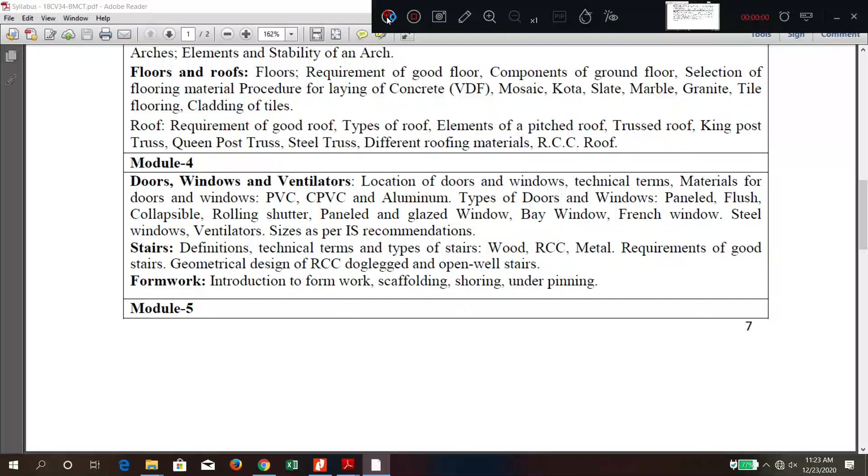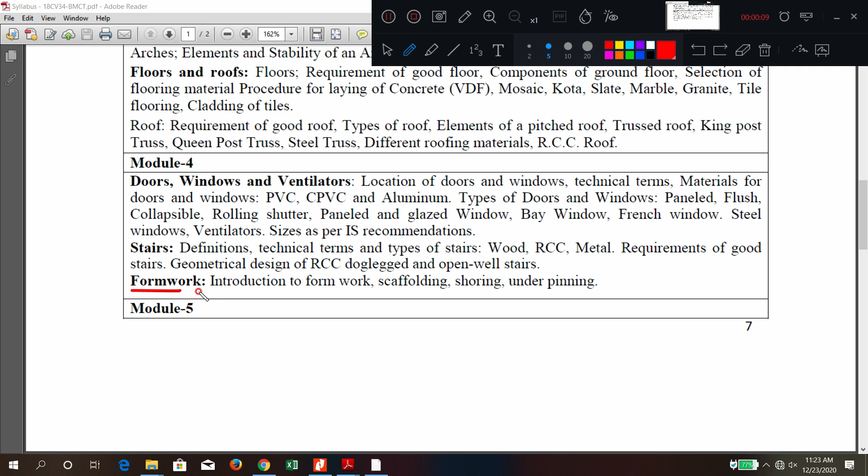Good morning, friends. Today we are going to discuss the next part in module 4, that is formwork. In this one we are going to discuss formwork, scaffolding, shoring, and underpinning. These concepts come under module 4.

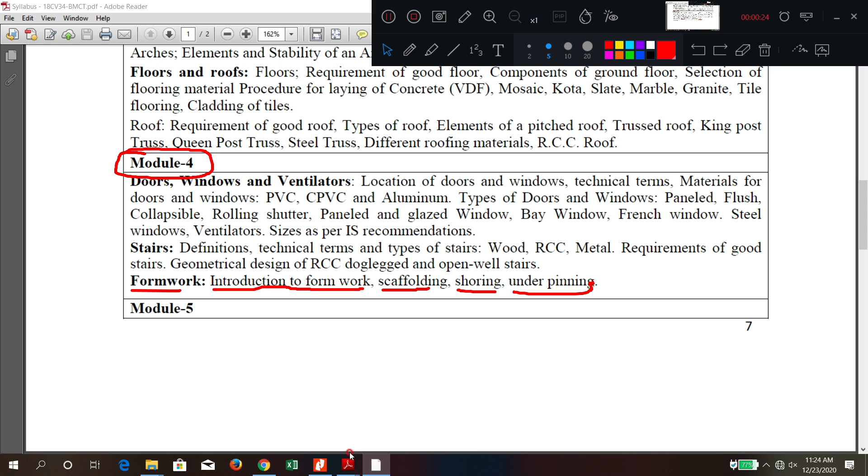Now when you hear the word formwork, what idea comes to mind? Formwork is a supportive structure given to concrete when it is in a fresh state. During the fresh state, concrete is not solid, it has not got hard, so to maintain its shape, size and dimension, a supporting structure is needed. This may be horizontal, vertical, or inclined. This supporting structure acts as a mold, so it is called a mold. It may be steel, wood, plywood, or a combination of materials, which supports the concrete during its fresh stage until it gets hard.

Then we are going to remove this formwork. Once it has sufficiently got hard, we can remove it easily. So removing of formwork is called stripping, a very important word.

For walls, the stripping time is different. Stripping is conducted once the concrete is sufficiently hard. There are different timings for stripping of different elements: for walls maybe 3 days, for slabs maybe 20 days, for columns maybe 7 days, for beams maybe 21 days. These different stripping times are mentioned in the Indian Standard Code.

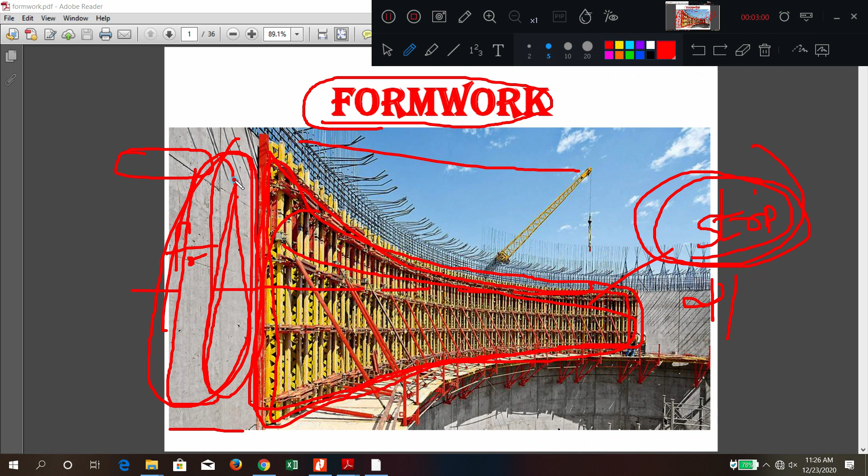So, first we have understood that formwork is a supportive structure which supports the concrete during its fresh stage until it gets hard. After it reaches sufficient strength, the formwork can be removed, and this removal is called stripping of the formwork. There are different timings, meaning after so many days only we should remove the formwork. If we remove the formwork before that, while the concrete is still in a fresh state without sufficient strength, the concrete may get damaged.

After understanding the definition and brief introduction, here we can see a typical wall, the wall of a dam. Similarly, we have so many other types of formwork for different types of elements.

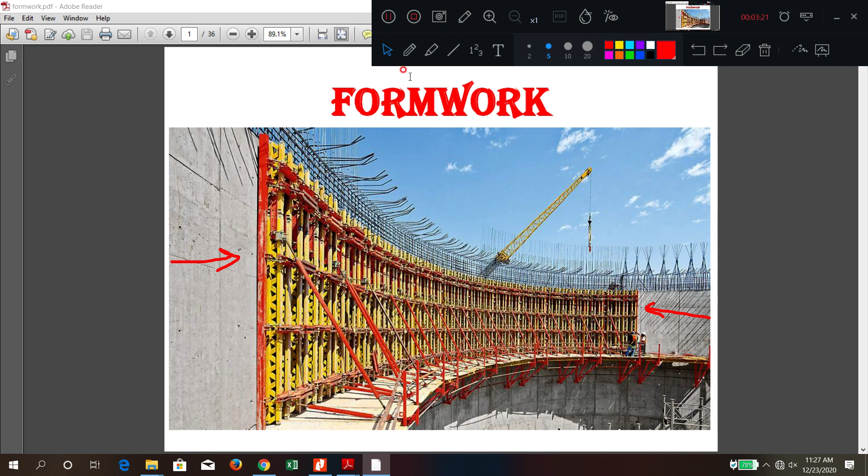Now you can see the definition here. Formwork or shuttering, it is also called shuttering, is a temporary construction in the form of molds. Molds mean something can be put or filled inside. So these are called molds, in which concrete is placed and allowed to get hard.

The cost of formwork may be around 20 to 25% of the total structure cost, which is a very important consideration. So whatever materials you use in the formwork should be strong and capable of being used repetitively. If used repetitively for the next structure, it becomes economical. Still, the cost may be higher, up to 30% or 40% in bridge construction.

When concrete has reached the certain required strength, only then is the formwork removed. So the operation of removing the formwork is known as stripping. After stripping, the formworks are reused for other building parts.

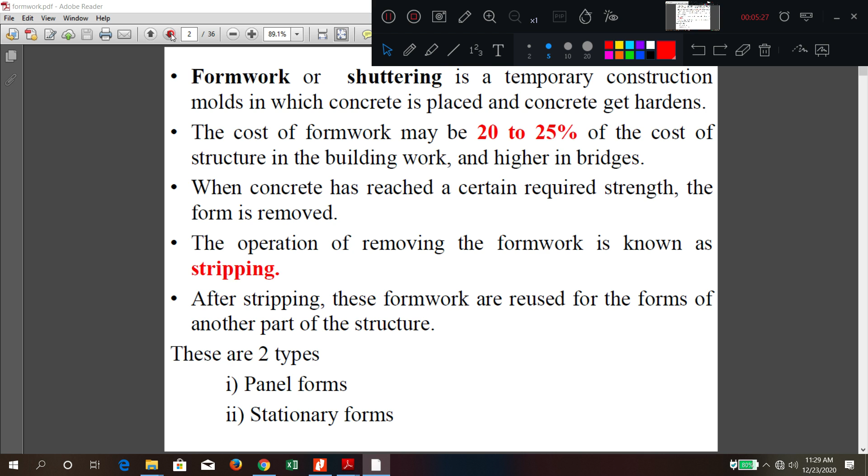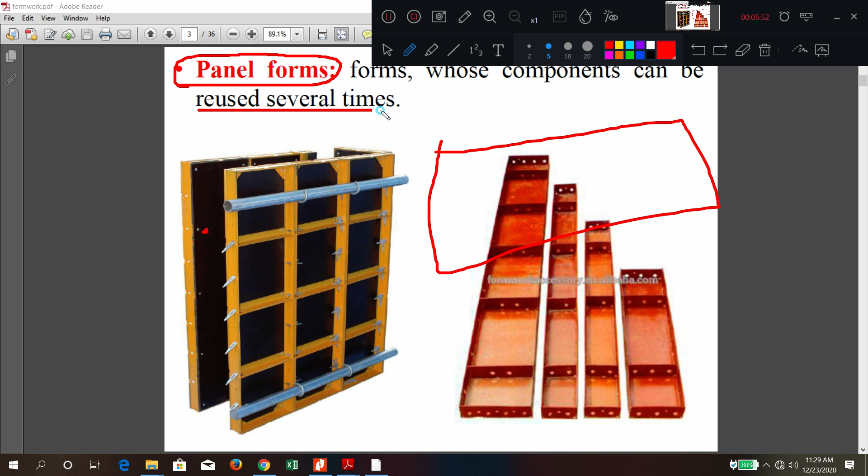Now we will go to the diagram part and understand different components. This is a typical diagram for panel type formwork. For a wall, it can be used in one part, and after hardening, these panels are removed from that position and fixed again in another position. That is why it can be reused several times.

Generally panel forms are in the shape of rectangle or square. Here the joining assembly can be made, where all the apparatus can be used, fixing of nut bolts, clamps, and supporting structures will be there. These are typical examples for panel type formwork.

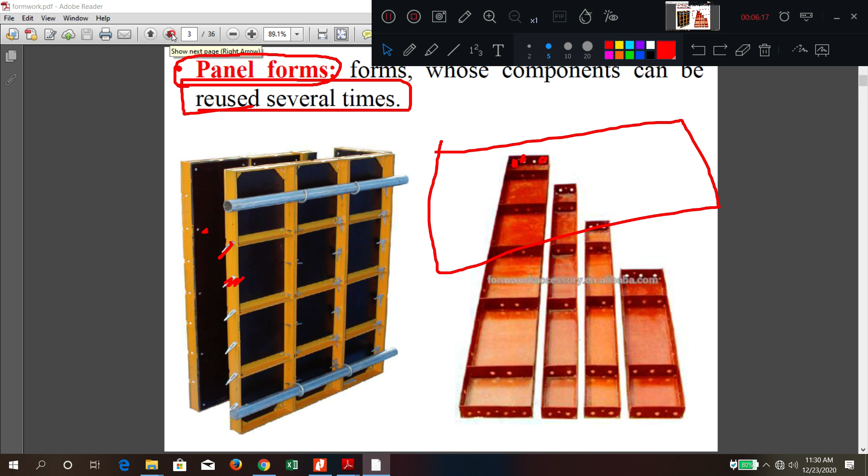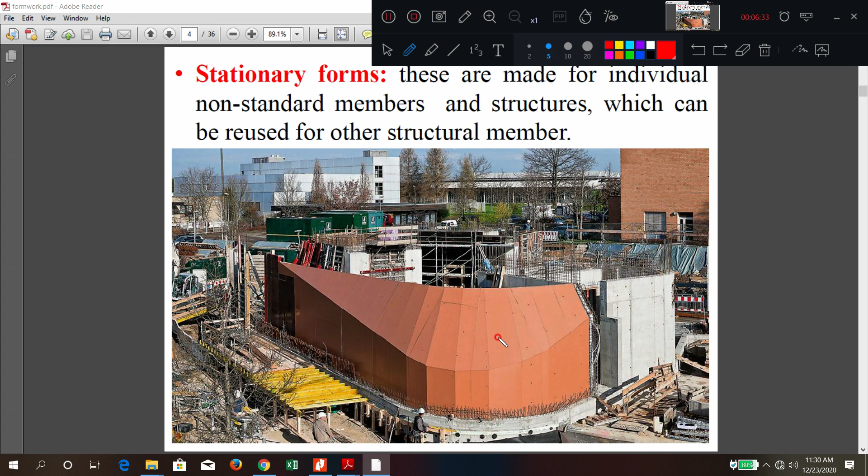This is a live picture of construction of some exterior wall of a building, where directly the concrete is poured. This is not in the form of a panel, but in the form of an irregular shape. So it is called stationary forms.

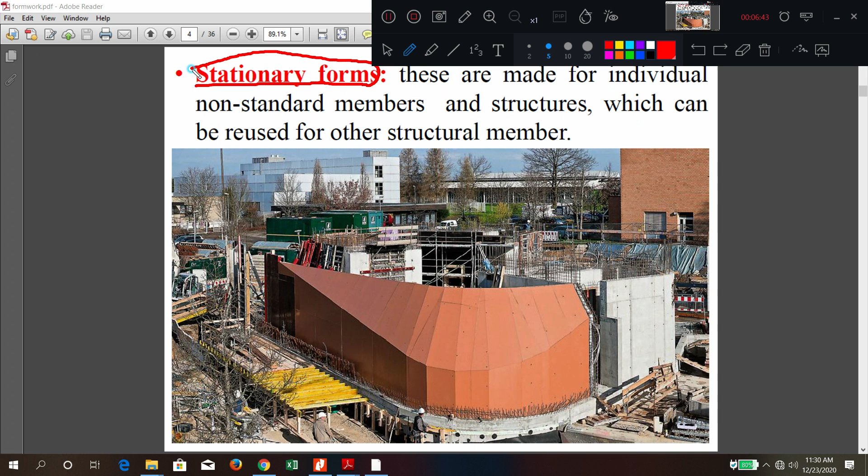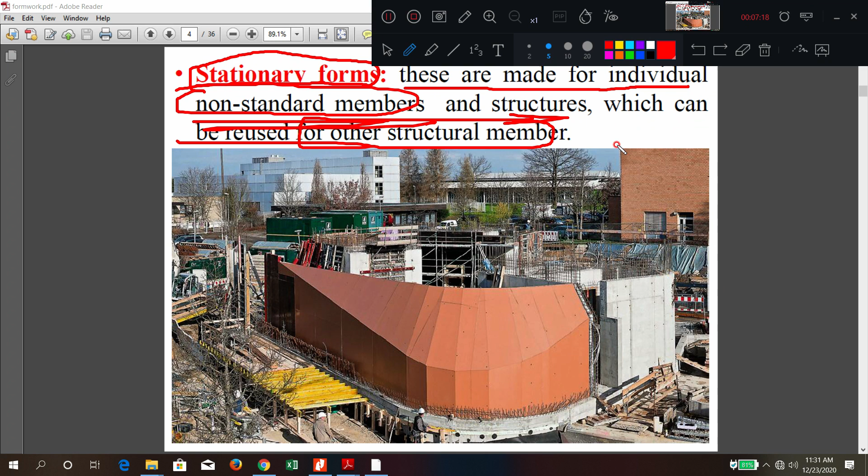These are made for individual and non-standard members, meaning we can only use them one time. These are non-standard structures which cannot be used for other structural members. This type of shape cannot be removed at all; once it is fixed, after stripping the pan, this type of formwork member cannot be used elsewhere - only one time they are used.

Formworks are generally classified depending upon the material used in the formwork itself. So we have wooden type formwork, plywood, steel, combined wood and steel, reinforced concrete panels itself used as formwork, and plain concrete. So many types are there.

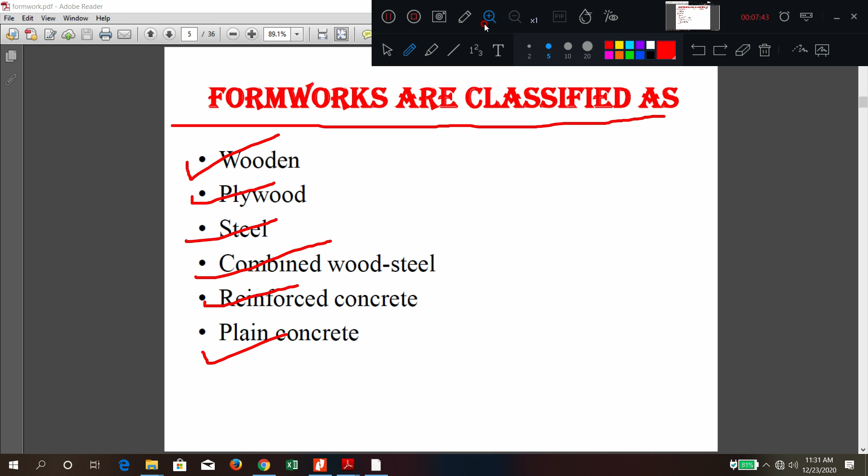What is the main disadvantage of wooden formwork? It has a possibility of warping. Warping is nothing but disorientation of its shape, meaning it is getting out of shape. If it is pure horizontal, after using it may deform somehow due to usage. So it may warp, it may swell - swell means increase in size, shrink means decrease in size. That is the main disadvantage of using timber.

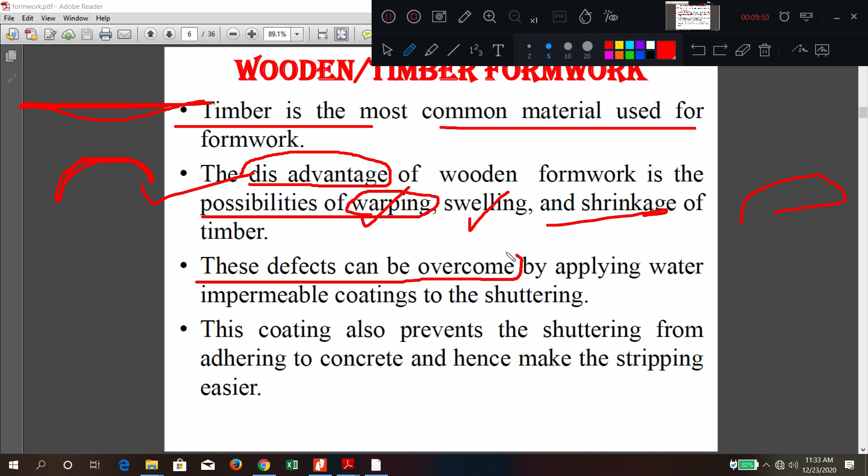Sometimes these defects can be rectified by applying water impermeable coatings. You generally apply these coatings inside the member, before fixing only, to prevent it from shrinking or swelling.

Because when concrete is poured, concrete contains moisture or water. So at that time moisture will come in contact with this timber piece, and when timber is in contact with water, obviously it is going to swell or shrink. So it will be disoriented in shape.

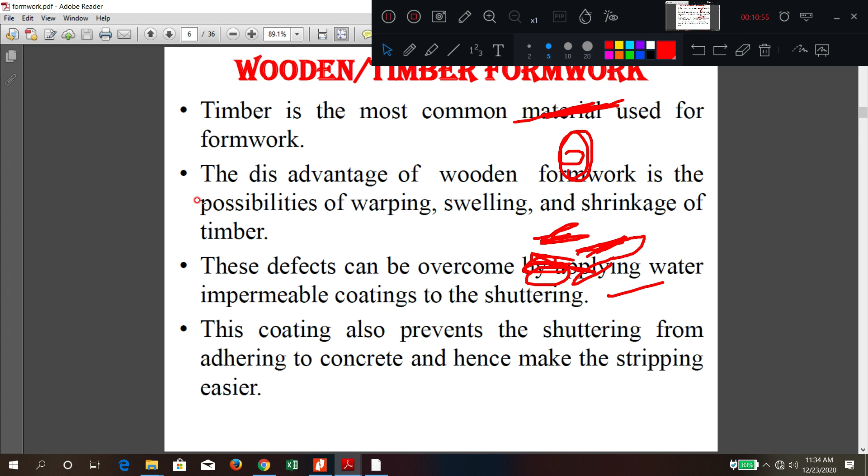So to avoid contact of water, the inside surface is coated with an impermeable membrane, generally oil, grease or something like that which is impermeable. This is applied on all the inside surface, so that it can somehow control the defects.

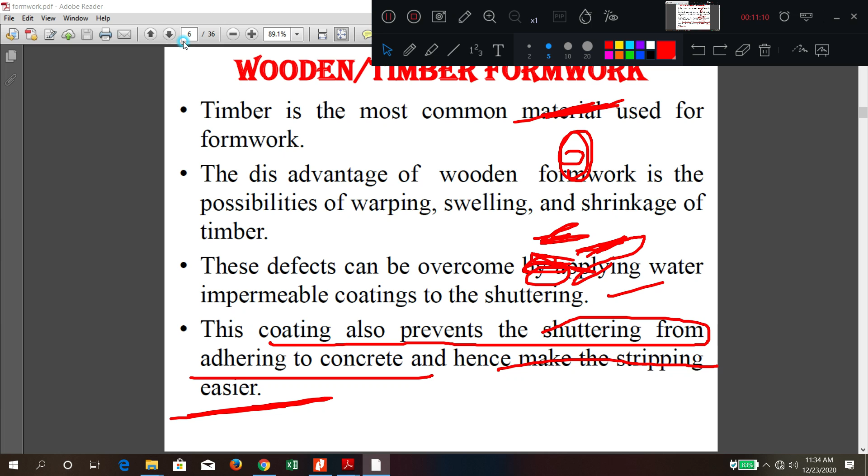This coating also prevents the shuttering from adhering to the concrete and hence makes stripping easier. If you are applying grease to the inside surface, the concrete will not stick to the wooden surface, so that when you are removing it, it can be removed very easily.

So removing of this formwork after concrete has hardened, that removing procedure is called stripping of the formwork. This stripping is very important and should not be done in a careless manner. Very carefully you should remove piece by piece, one by one.

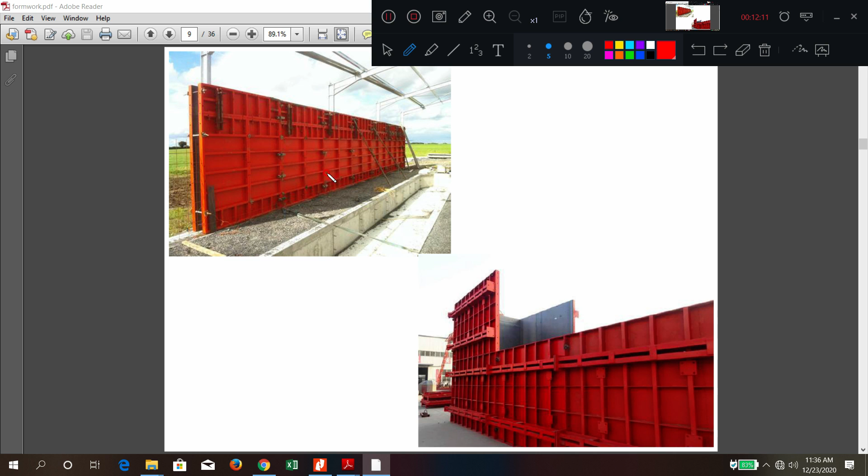Now come to the steel formwork. If you see the diagram, then it will be easy. Steel formwork will give a very smooth finish. Assembling these formwork pieces is also very easy, and de-shuttering, meaning stripping, is also very easy compared to wooden formwork.

But the main thing is these are costly, and this may lead to rusting or corrosion. So there are two disadvantages: one is costly, second is rusting or corrosion may take place. The main advantage is that these are very strong, such that they can be used several times compared to timber. Reusage is very high in steel.

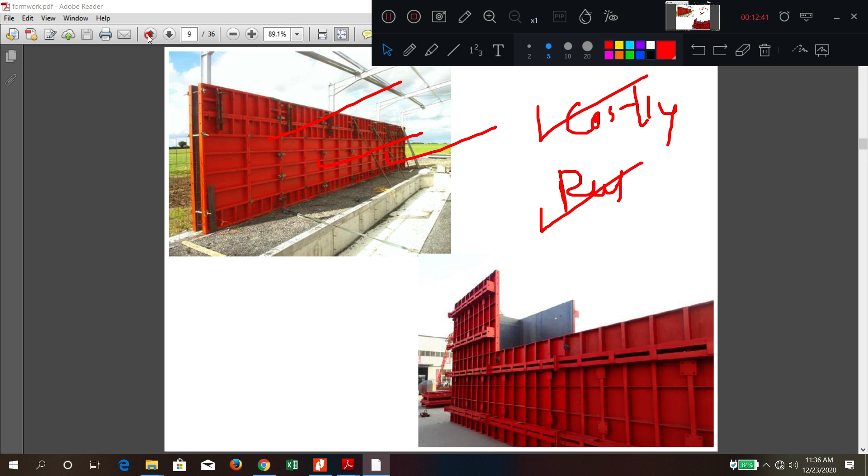Steel shuttering is used as a major work. It has many advantages. It can be put to a high number of uses, meaning reusage may be more than timber formwork, and stripping is very easy in this case.

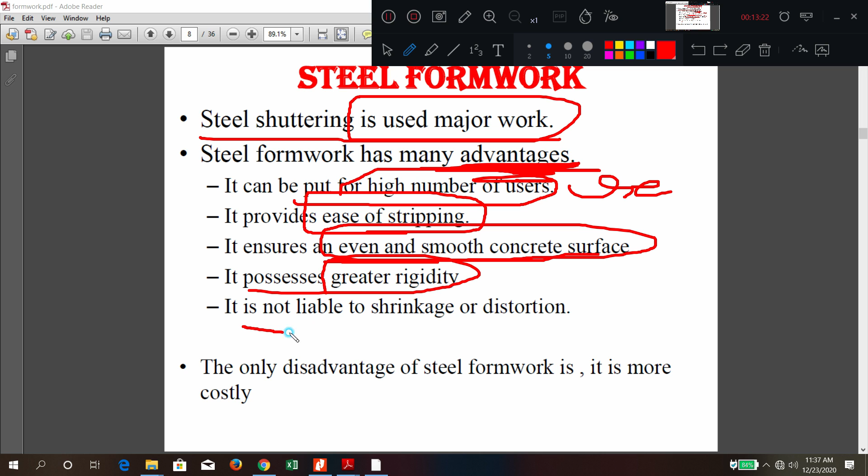You can disassemble them very easily, and it will give a very even and smooth concrete surface. So it possesses great rigidity, meaning strength is high. It is not liable to shrink or distort because it is very rigid, so it will not get swelling or shrinkage.

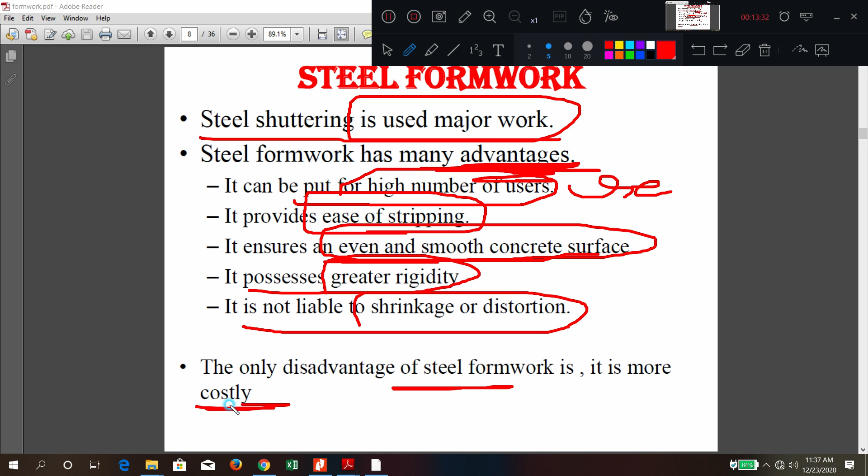The only disadvantage is it is costly and it is going to rust. This is an example of steel formwork for a wall, for an RCC wall.

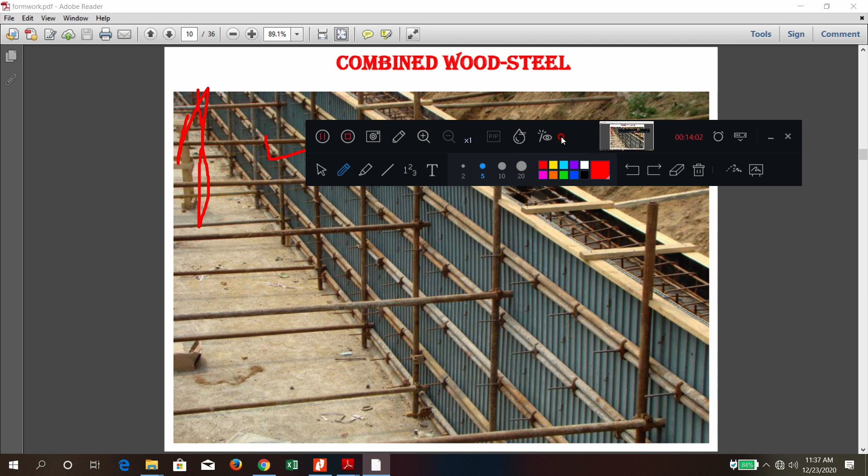So this is another steel formwork for RCC wall, where steel members are used along with wooden members. So here the name given is combined wood and steel. The panels are made up of steel, and the other supporting members are made up of wood or timber.

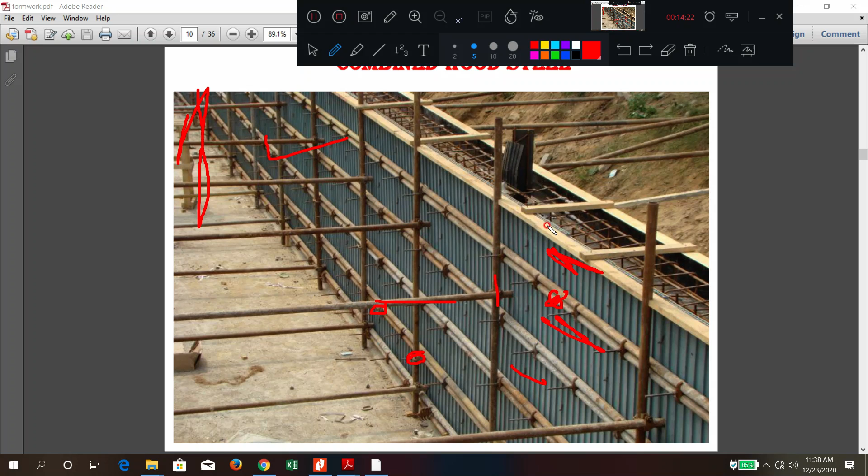You can see here clamps, nut bolt clamps, which can be used. So here some pieces are made up of wood, as you can see. This is a combination.

So what are the requirements of good formwork? This is a very important question from the exam point of view. The material of the formwork should be cheap and it should be suitable for reuse several times. Whatever material you are selecting should be very cheap and usable for several times.

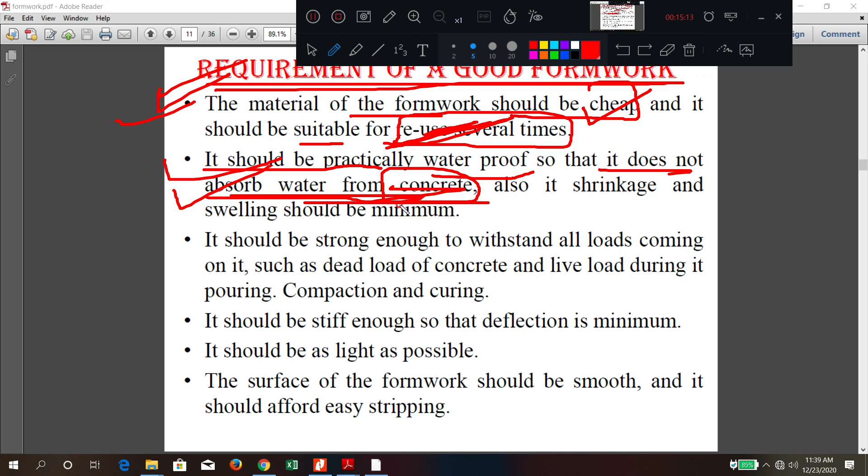Reusage quantity should be very high. It should be practically waterproof so it does not absorb water from concrete. That is what we are telling now, applying the impermeable membrane. It should be waterproof, it should not absorb water from concrete, and it should not shrink or swell.

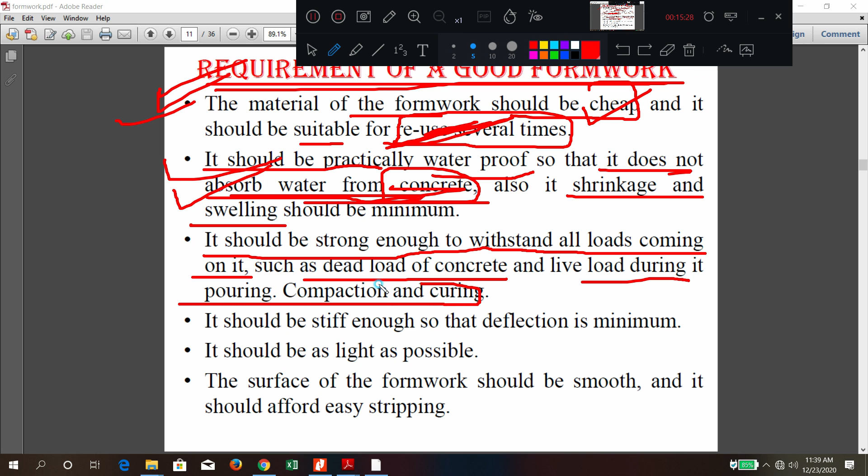This should be very, very strong. Whatever formwork you are using, it should be strong enough that people can walk on it sometimes, because concrete is poured inside after fixing the formwork. So there will be people moving on it, and it should be strong to support the weight of concrete as well as the people moving on it. The people who are moving, we generally call that live load.

The live load is the people who are moving, and dead load is the concrete as well as the formwork's own self weight. So the formwork should be strong such that it supports the weight of concrete, that is dead load, and weight of its own members, which is also dead load, and the laborers moving on it, which is called live load. It should be strong enough to withstand that.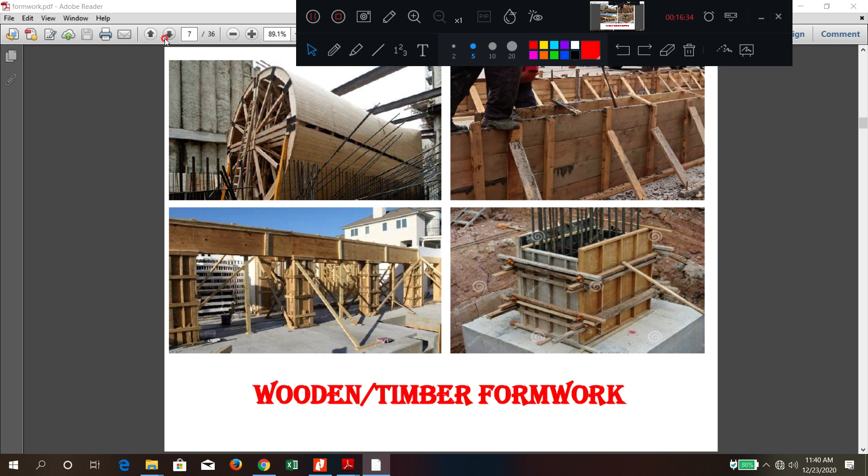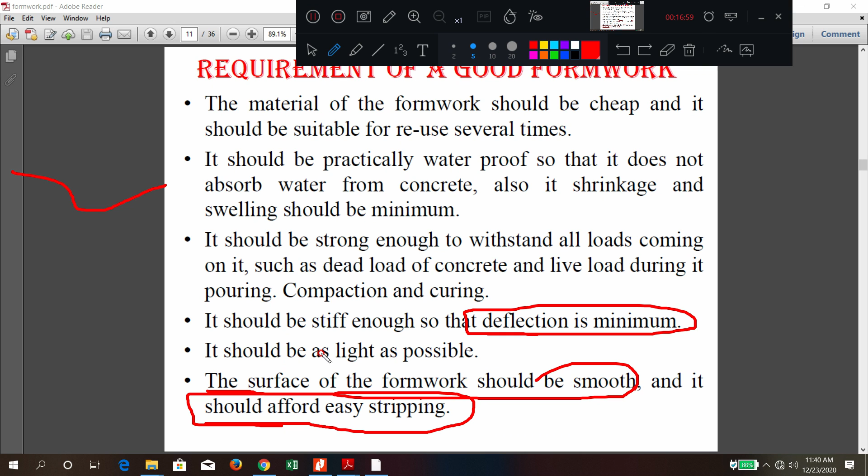It should be light. That is a very common requirement. The surface of the formwork should be very smooth, and it should be easily stripped. Stripping should not be very difficult, and whatever loads come, the deflection should be minimum; it should not get deflected. So it should be light, deflection should be minimum, inner surface should be smooth, and stripping should be very easy. These are some of the requirements of good formwork.

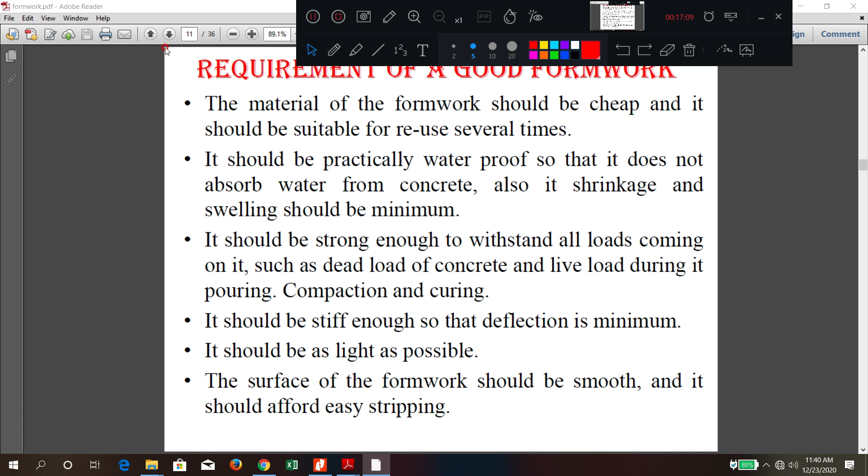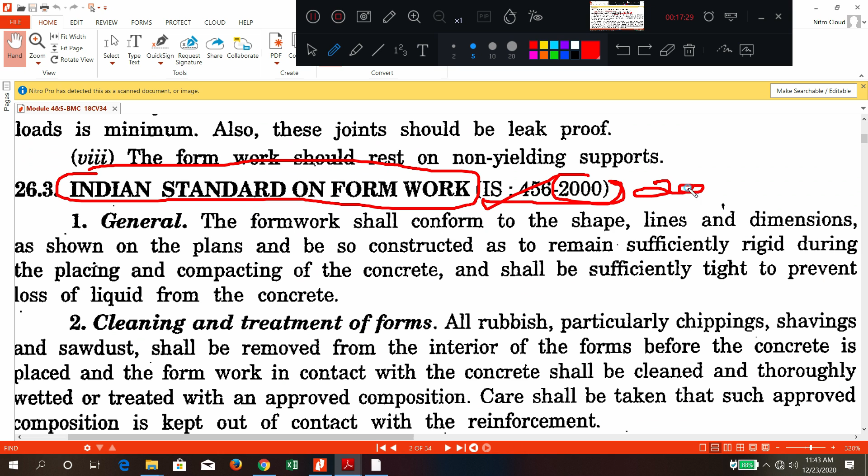Now for formwork, what has been given is the Indian standard on formwork. There is a code book called IS 456. The edition is 2000, but now 2010 is also there. The Indian standard code book has given some provisions, some clauses regarding formwork. What are the clauses they have given? Just go through this for additional information.

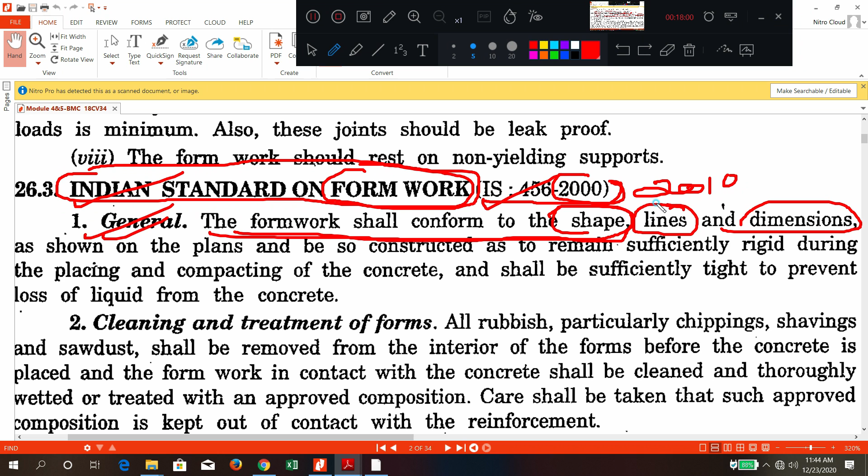General - what does general mean? The formwork should be in good shape and in good line, and it should have correct dimensions of the work. That is the first point. Only this is sufficient: general means the formwork should be in correct shape, correct lines, and correct dimensions, and it should be rigid. This is also one of the requirements we already studied.

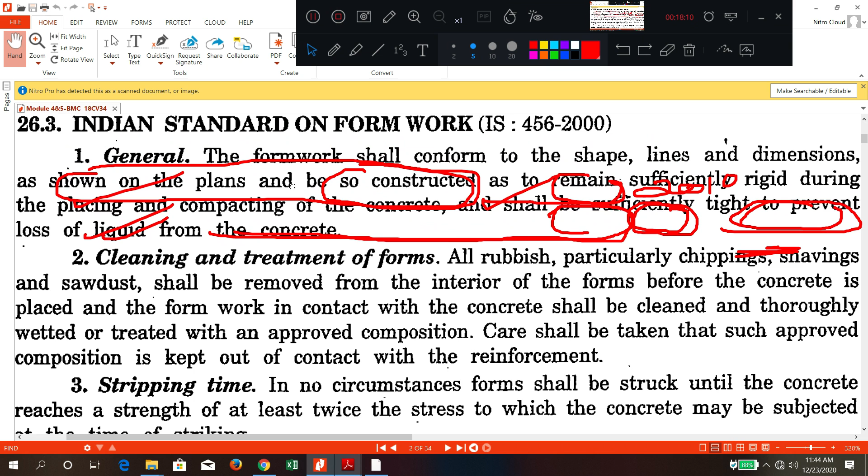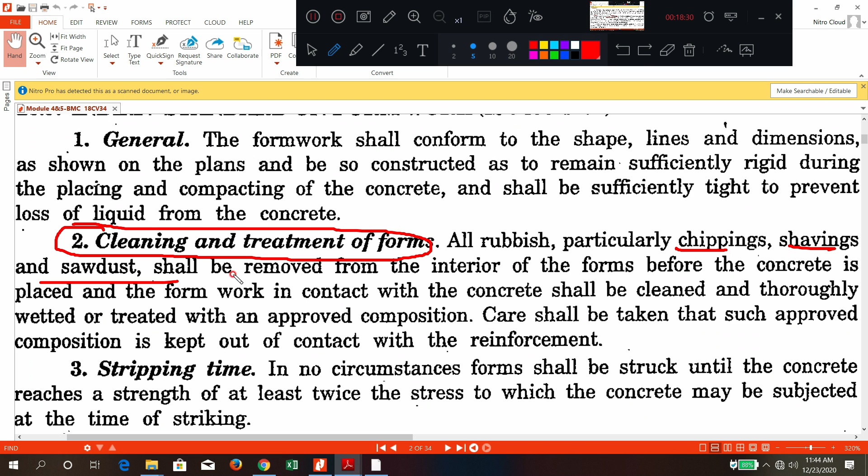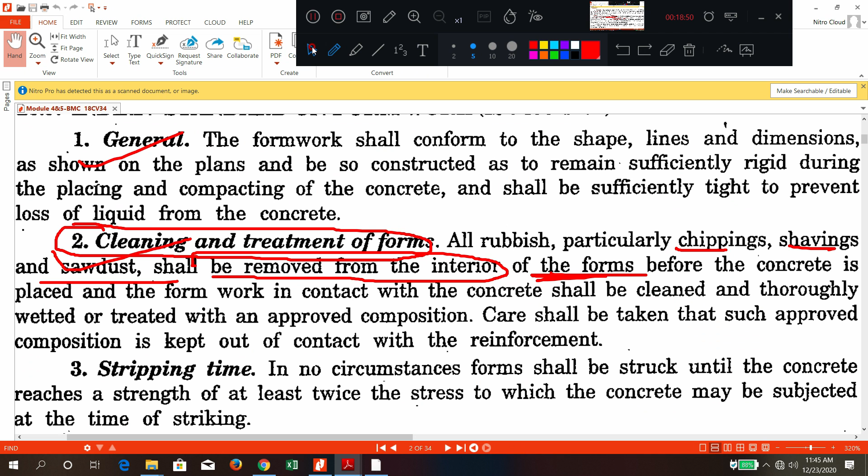Before fixing the formwork, what should be done? It should be cleaned, and treatment should be given. For what reason? If any chippings, shavings, sawdust, or any already stuck material is there, it should be removed. So the interior of the formwork should be very smooth and free from all dust particles. So first is general, second is cleaning and treatment - it should be cleaned and given treatment to remove all these things.

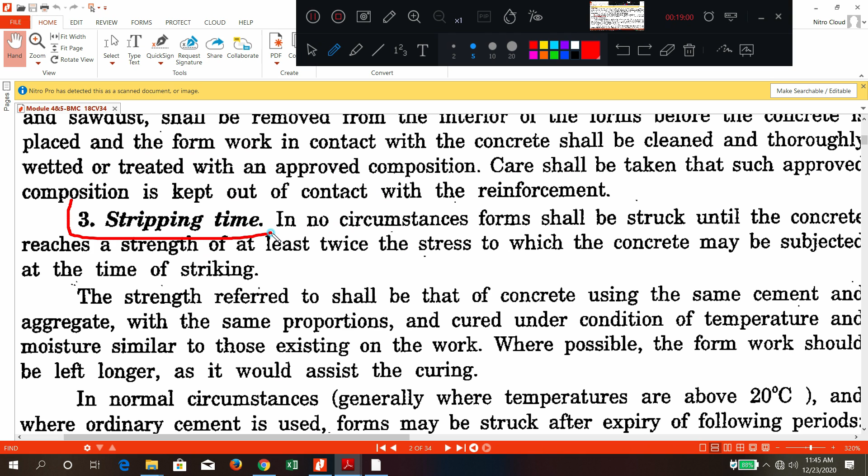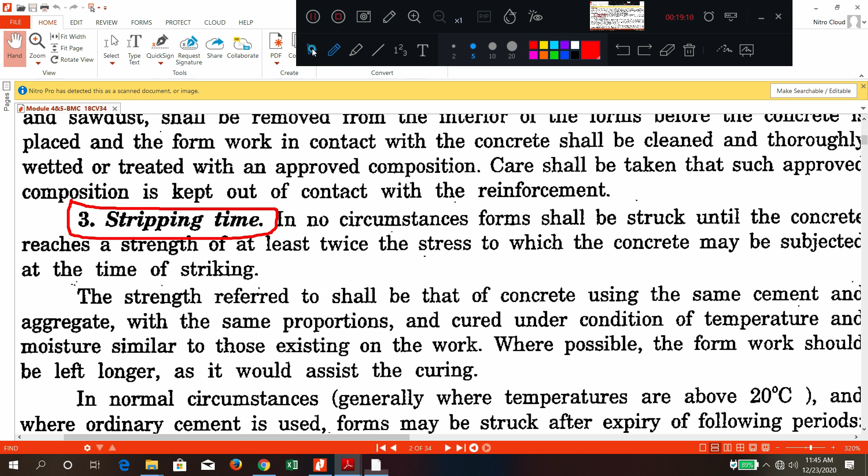Third is very, very important: what do you mean by stripping time? What is this stripping time? Stripping time means the time after which the formwork is removed. So how have they given the timings of stripping time for different things? You understand, when it should be removed - after the inside concrete is sufficiently strong, only then should you remove that formwork. But still, here they have given some timings for the stripping time.

For walls they have given 48 hours, meaning after 2 days you can remove it. For slabs and all they have given 7 days. For beams and arches, if the length is less than 4.5 meters, it will be 7 days; if length is more than 4.5 meters, it will be 14 days. That is what they have given - stripping time for walls is 2 days.